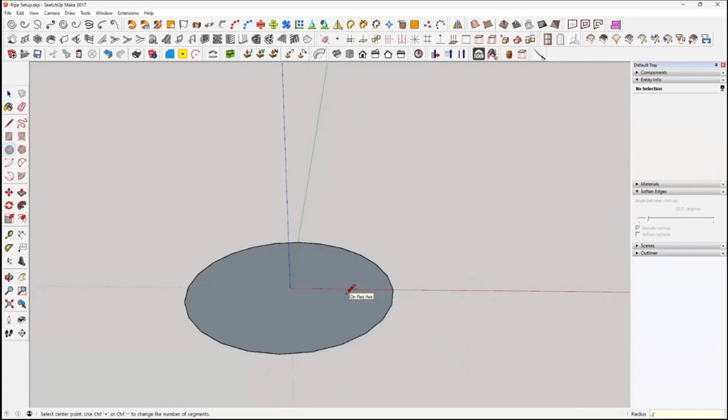So in SketchUp, the rod was 4mm I think. Draw a circle right in the origin along the red axis, so it's 4mm, so that's 0.2, and that'll give me a 4mm inside.

We'll click on the circle, come up to the entity info, it tells you the radius is 0.2, and up the segments to 40, which gives a bit of a smoother curve.

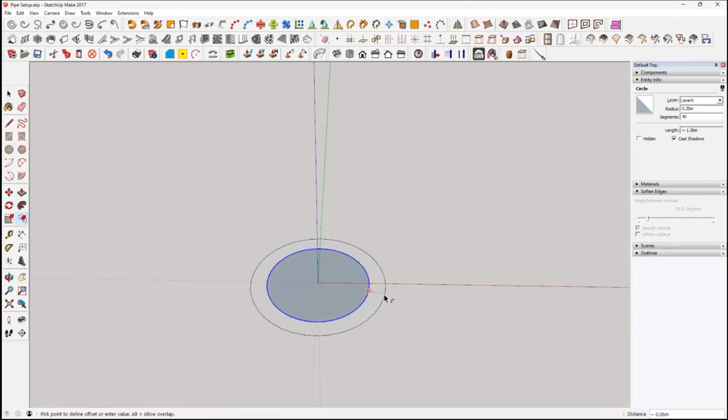What you need to do is go to the left and the offset tool, click on the edge and pull out the offset, 0.05, that's 0.5 mil. Sounds good to me.

So what we do is highlight all that, move tool, click along the right arrow to keep it on the red axis, and control, and it'll duplicate it along the red axis. Just to give us a spare one there in case I mess up.

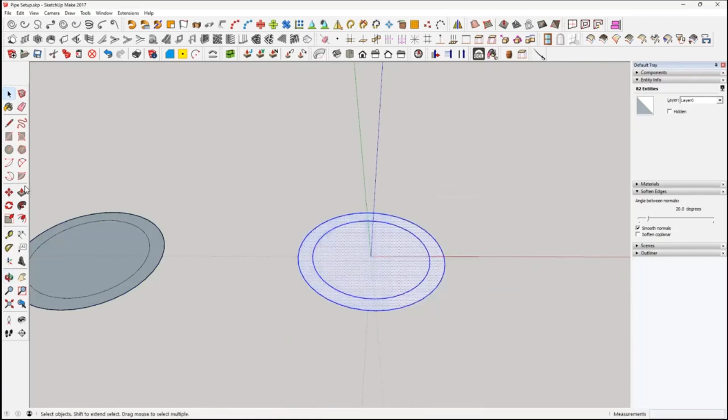So these actually, we should have reversed the faces on these, so we've got the white faces facing out. Right click, reverse face, delete the middle one. Now this is going to be the thickness of our pipe, so it's 0.5 mil thick.

What I need now is a guideline, so I'll get the tape measure from the centre, because the overall height - I'm doing a T joint, by the way - is going to be 10 to 11 mil. So if I click on the centre and draw it along the red axis, the centre of it will be half, so 0.5, just for demo's sake.

So we've got a guideline here, it's 5 mil long. We'll come over to the left and we'll use our pie tool.

Now what we want is, we don't want it flat, we want it upright. So if you press the left arrow, it changes it to the green one. Click on the end of the point we made, then go to the centre, or actually press red, and it'll constrain it - you can't go off centre then - and it'll click to the origin.

So we click there, and what we do is start drawing our arc. Now it's your choice, you can have whatever you like - we'll do a 90-degree elbow, so we tap in 90, bottom right hand corner, 90, or press enter. So we know that's going to sweep round.

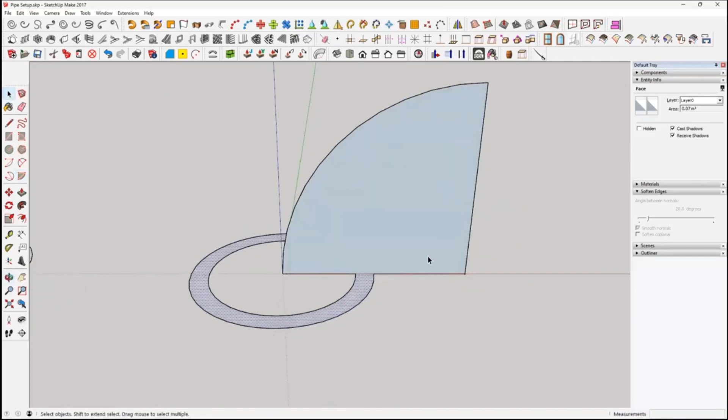So what we need to do is come in and delete some of these lines we don't need - the bottom line there, there's one dividing this circle, delete that one, delete that one. So what we need to do then is make this ring follow there, hopefully give us a pipe.

So what we need to do is click on this swept curve, and then go to the left, there's a tool there called follow me. Click on follow me, and then click on that blue line, and then we got a curve.

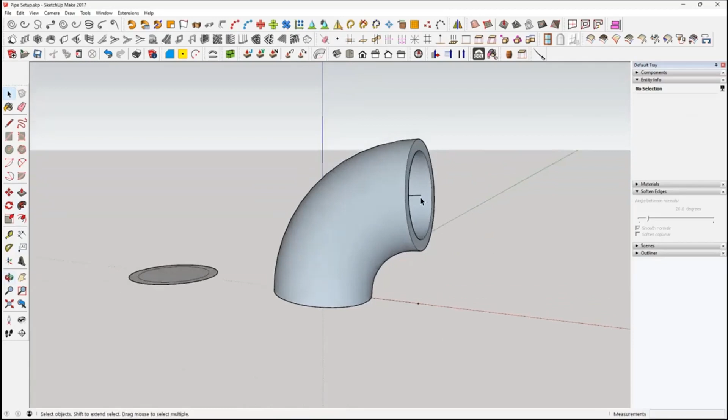Now, point being, this isn't right, because if you look at it, it's followed the curve, and that last section may look straight, but it's not. If you look at that now front on, let's look at it front on - you can see it's at an angle.

So we do a Control Z. There's an easy way around that.

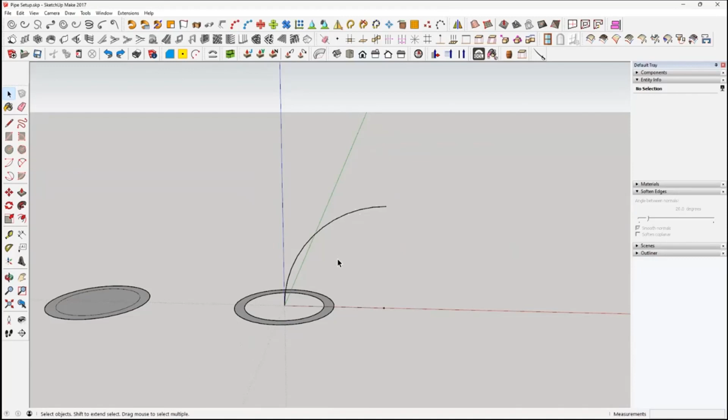We'll click on the line, and what we'll do is draw a straight line. We'll get a pencil, and then go along the red axis, so change this to red, 0.1, enter.

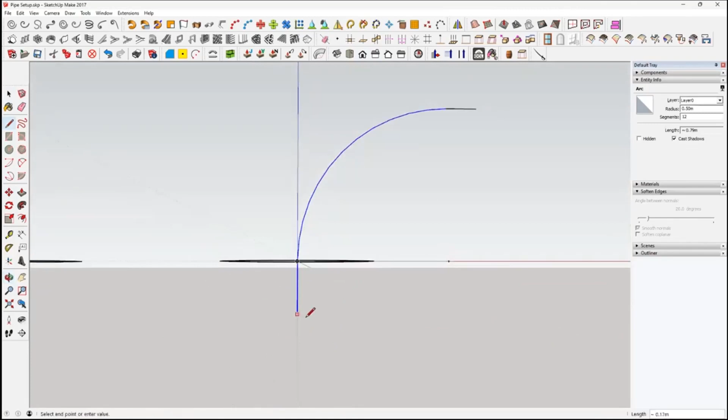And then we'll come to the middle, and go on the blue axis, so we press the up arrow to constrain it to the blue, and then do a 0.1. So now what we've got is this small section.

Excuse me, one minute.

Frog. The middle section and the end section. Now if we click on all three, or we click on the end, do a control-click, we've highlighted all three sections. Up to the top, there's a plug-in.

John will put a link into this one. I'm not sure what it's called, this one, but it's called Super Weld. So we'll weld it together, so it is now one line.

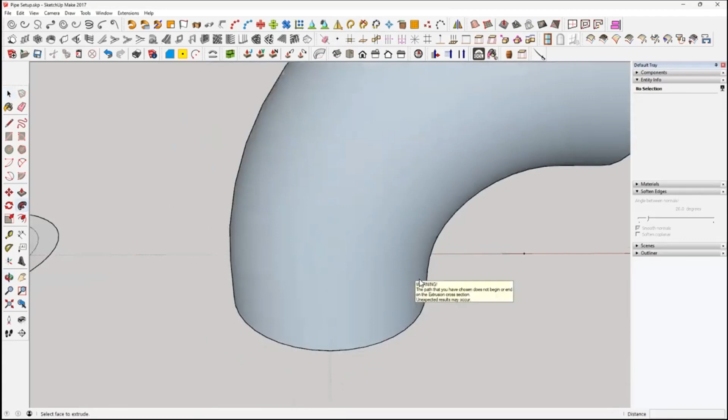So what you need to do is click on the line, click on the follow me tool, and now that's follow me, and that is straight out the end of the line. So what we need to do is highlight it, right click and reverse the faces.

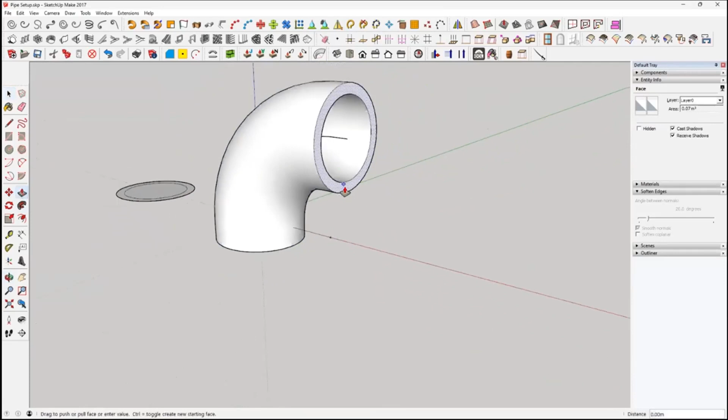But now if I click on this front edge and pull it out, and click on the bottom edge, that'll be a right angle. So that's what we need. So yep, we're good with that.

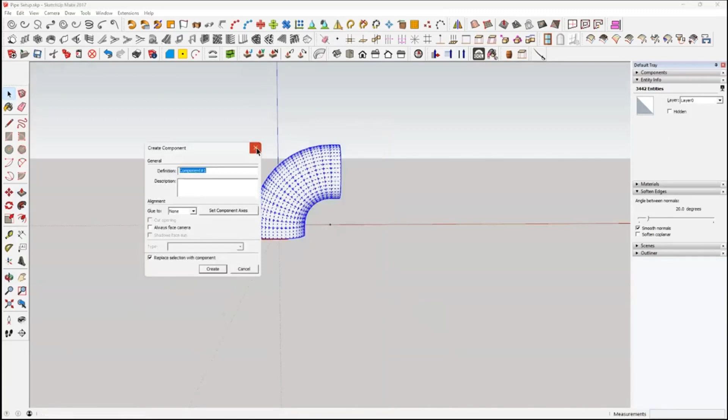So we'll triple click this object, right click, make a group. Right click, make a group. And then we'll right click.

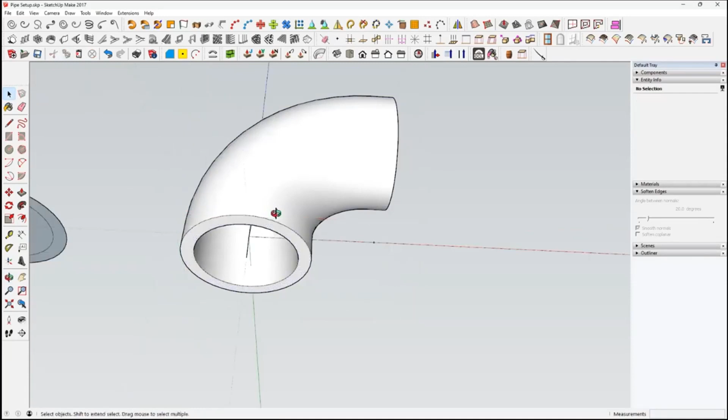Actually, what we'll do is, see this ring at the bottom, we'll double click the group to open it, click on the ring, and we copy it. Then we'll click on this object, right click, and we'll hide it.

And then we'll do an edit, paste in place. So we know that's the diameter of the pipe. Now we don't want this one, but we can still use it because it's bang in the center.

So if we come up to the extensions, what we do is we explode that curve. So now it's all in different sections.

So what we need to do is go up, say one section, not the bottom one, the next one up, and delete it. There is now a gap between the bottom one and the main curve. So if we triple click on that, it will select all that curve and we delete it.

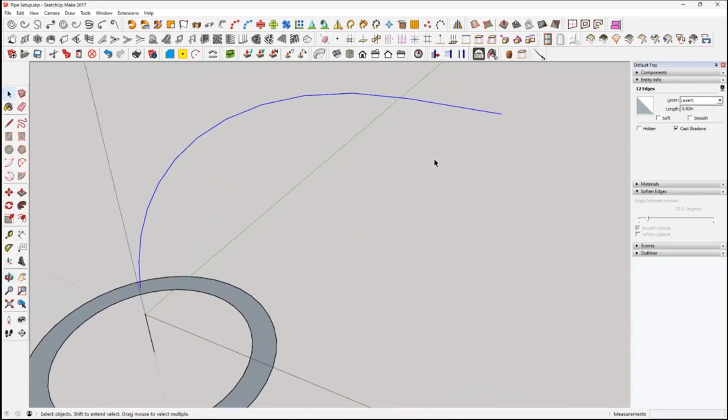At the bottom, we've got the loose bit and then we've got the other bit. So click on the bottom, do a control, click on the up, and then weld it together with Super Weld.

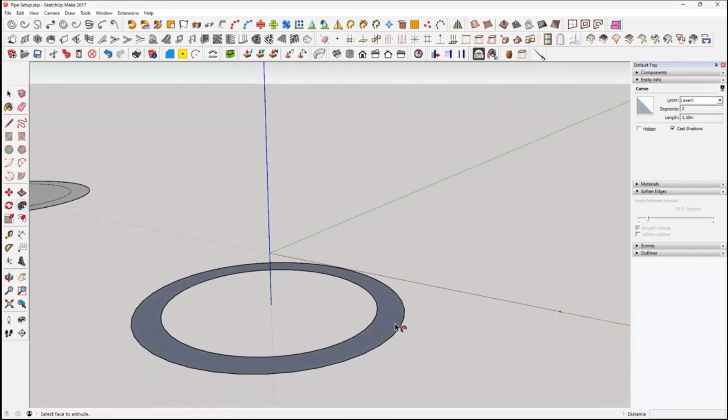So it's one item. Click on the item, the line going up, follow me tool, and then we click on there. And then we've got our up pipe.

So if we highlight this, right click, and there is a soften smooth edges option. Do that and it just softens the edges for you.

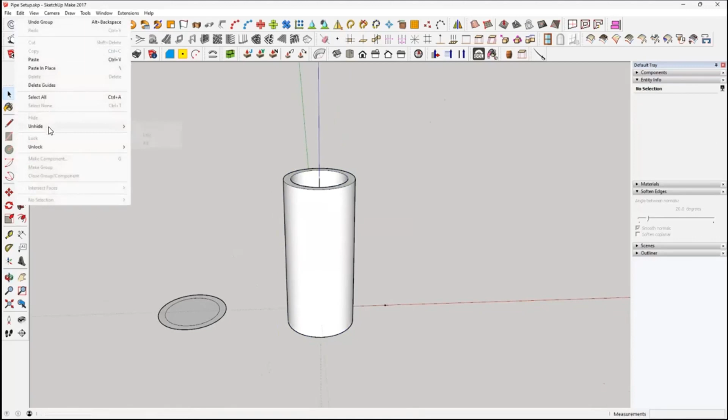Triple click, right click, make a group. And if we do an edit and we unhide the one we hid, there we go, we got our T-piece.

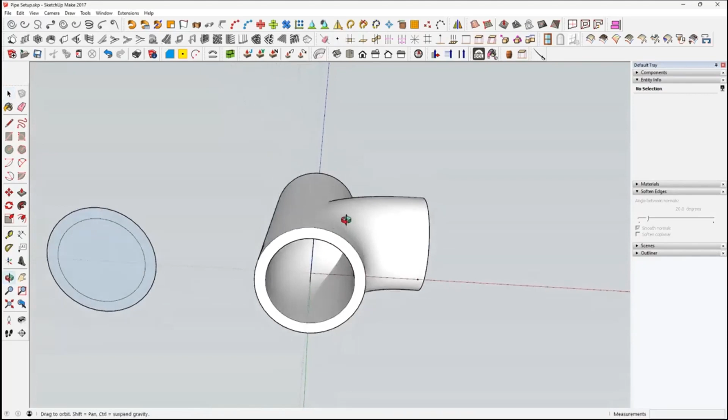Now, you can explode this, join it, intersect it, because at the moment there's no hole in it. But the way I'm designing this is to push a rod inside, and I found that leaving that piece in the middle actually strengthened it in there.

So you can come in, intersect it, take bits out, but really there's no need, unless you're going to use it to look through. But if you're going to stick a pipe in the end, you'll never know. So now we've got two bits.

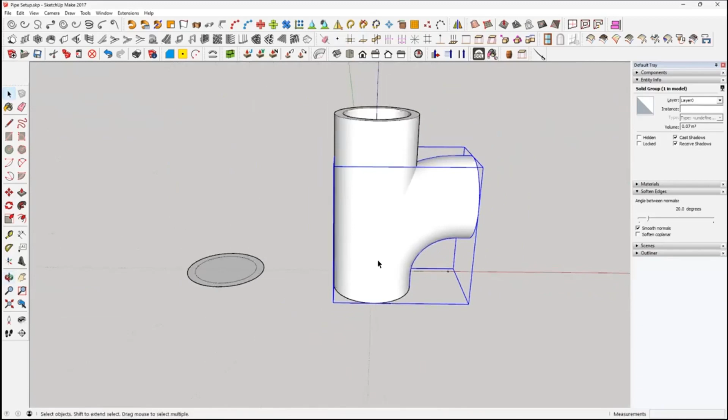Right, what we need is a collar to go on there. So we've got our original, and we know that's the outside wall. Let's delete the middle. Actually, we'll duplicate that just in case.

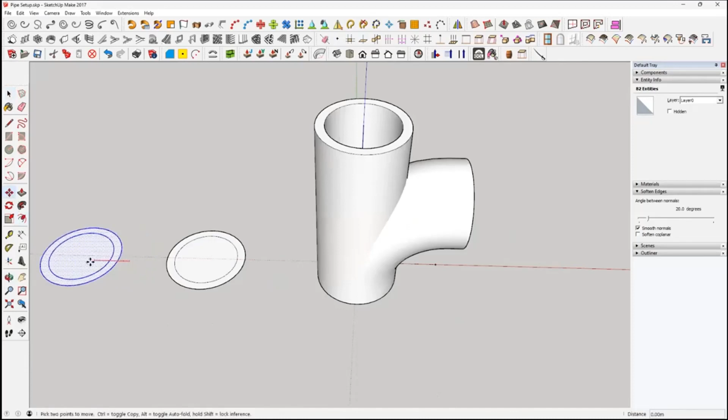Do a control along the red. That wasn't far enough, was it? Move it along the red. Good. So we'll come in, we'll delete the middle bit, but then we want to make a collar.

So we know this is the thickness of our pipe. We get the offset tool and we click on the edge and we come along and we now do another, say 0.5, no 0.1. Too much? 0.5. Oh, I know, 5. Yeah, that's probably better.

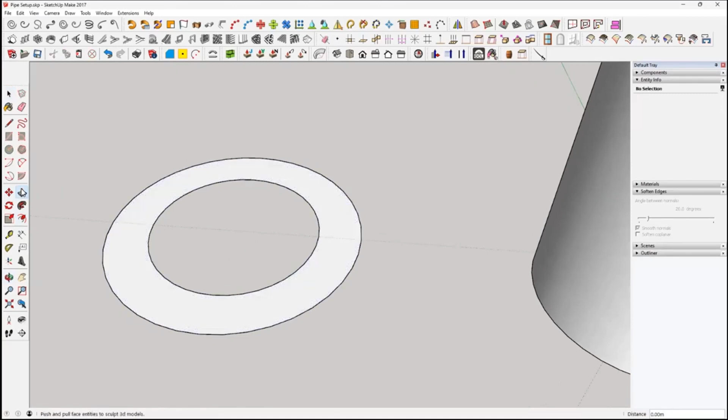Right, and then what we do is take that middle ring out, delete, and this will be our collar. So if we pull that up, sorry, push pull tool on the left there. I must explain myself. Push pull tool, and then just pull it up. So 1 mil, 0.1, 1 mil.

What we need to do is triple click to select all, right click, and make a group. We'll use that as our collar. What they do is put this on top of there.

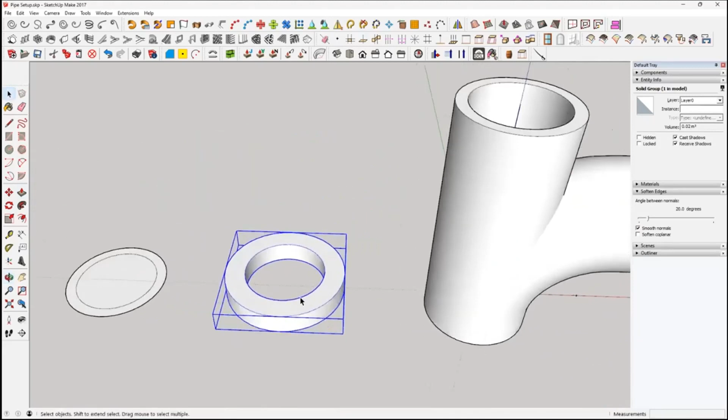Sometimes, if you're clever, you can get it there in the middle. Click on, press the up arrow, so we're going up, then click on there, the edge, and press the up arrow again. If you're clever, it works - it actually lines up perfectly.

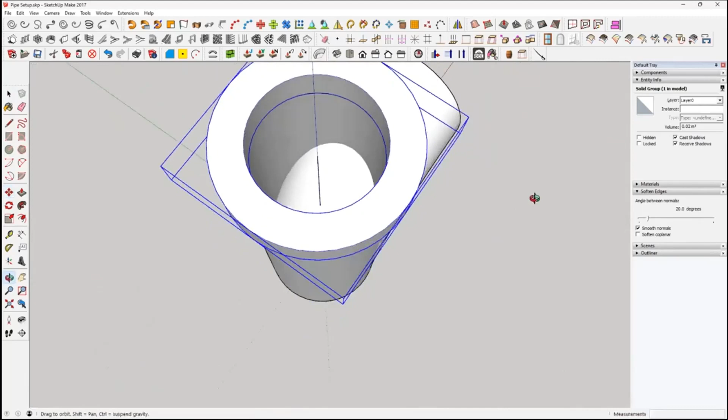So now we've got our collar top. We click on the collar. Oh, I just moved that. Click on the collar - yeah, it can't move.

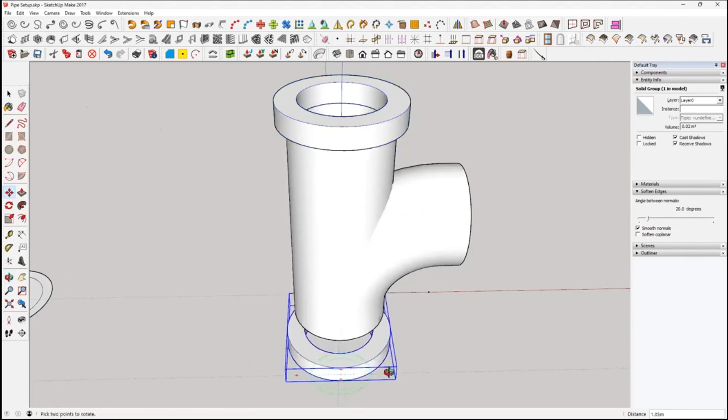Do a control along the Z axis with the up arrow, and we duplicate it, come down. Same again, click on the edge, just go up until you meet. There we go, and that's perfectly lined up.

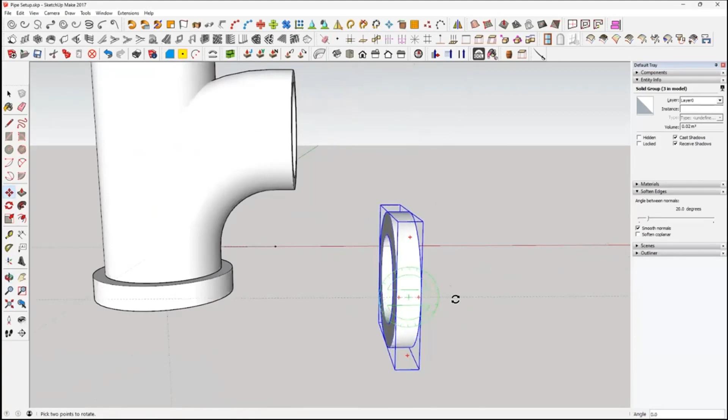So now we've got that, we want one on this end. Easy way to do it is control along the red axis, and like I said before, if you hover over it, one of the crosses will bring up a protractor tool. Bring it round, angle 0, that'll be straight. Same again, see if we can get it spot on this time.

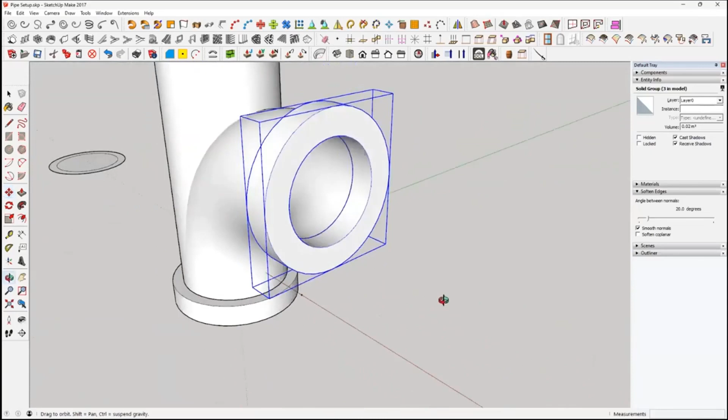Pick the middle, up arrow, to there, and ooh, good shot, there we go. So basically that is an elbow.

So we've got 3 different parts, which is worth keeping separate, because if you want to make other stuff, it's all there. What you can do is click on the right angle and then click on the collar, and those 2 bits, right click and make it a group.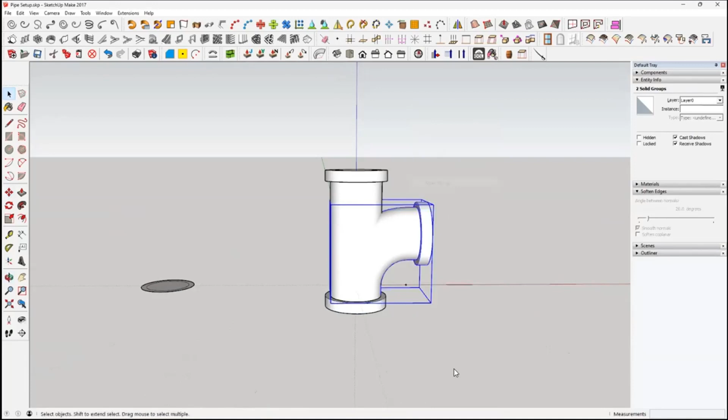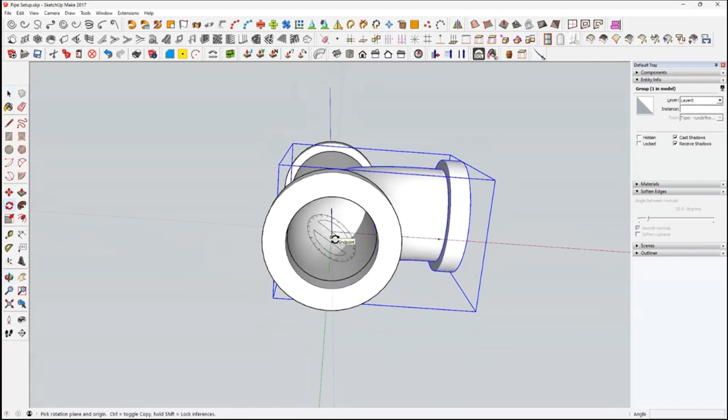So now what you can do is come in the bottom. We've got our line that we drew from earlier, which we know is dead straight up the middle. If you come with a protractor tool, first we'll click on that collar and elbow on the sweep there. Go on the protractor tool, find that line, put your protractor on it, and press the blue, which is the up arrow.

Then what we need to do is click on and we'll find the end there. You can see it changes - should change. It's a bit awkward because it's from a distance, but I think that's it.

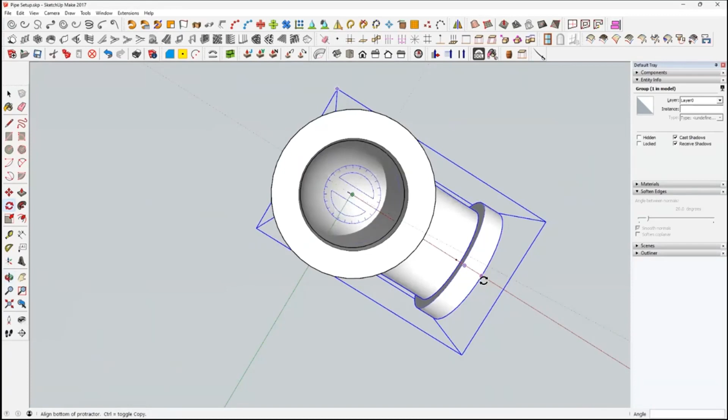There. Then what we do is control, and then we can move it round. So if we move it at 90, there, it's got an angle - you can type the angle in, but we're actually on 90. Click on, and then do the star times 3, enter, and there we go. We've got a 3-way doobrey for our pipes.

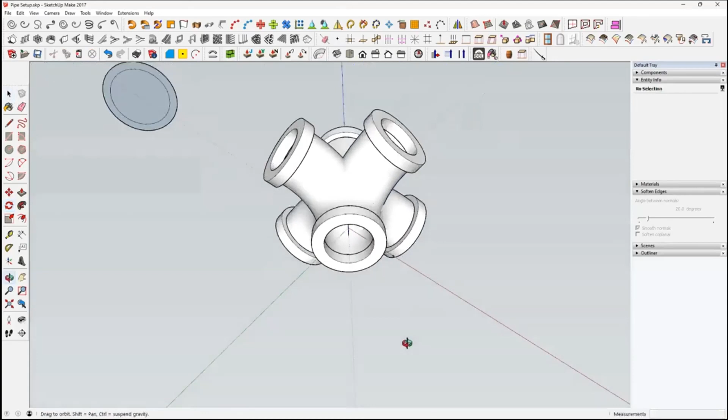Now highlight the whole thing, click on, control along the red axis, times 3, there we go. So what you can do now is delete that.

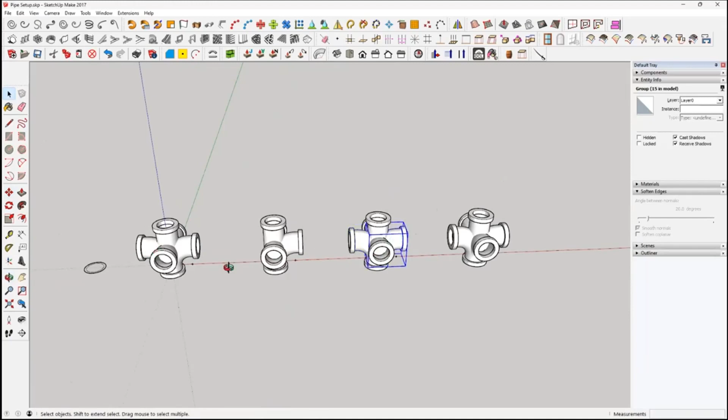You've got a 3-way, delete those 2 - or no, we've got that one, haven't we? You get the idea - you can duplicate that and make what combination you like just from the one angle.

And then these do print. I will show you - I have set it up already.

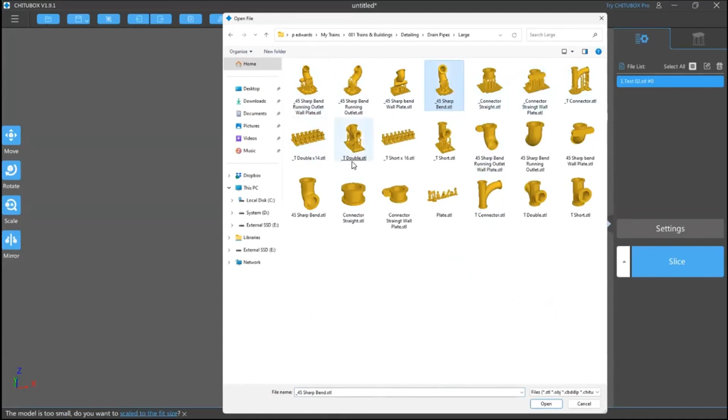If I open there, my detailing, where is it? Drain pipes large. So what I've done is I've got different ones set up here - plain, straight, curved - and they're pre-supported as well. So there we go, what we've got.

There's that window down there, we'll get rid of that. We'll just minimise slightly, Ed.

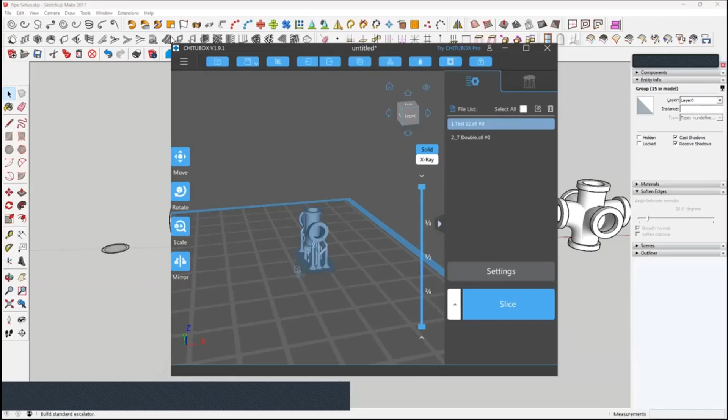Yeah, I'm with you - just as you said that, John. Yeah. Can you see? Yeah, spot on, mate, yep.

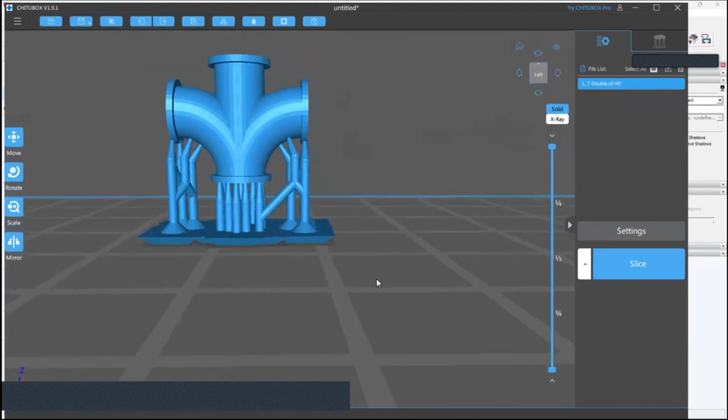So there is a pre-supported one - I just did a left and a right. And those supports come off very easy.

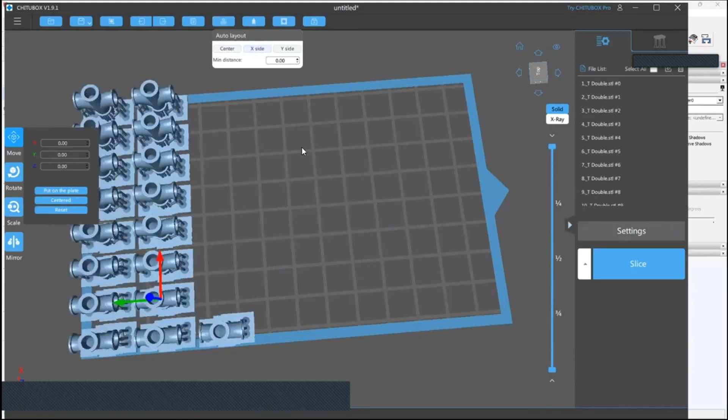Print these off - I normally print, say, 10, 20 of them in one go. If you press copy, get a load of them, and arrange to the side. Take that one out - bit close to the edge, take that out. Take that out. Select all, there we go.

Put your next lot in. Fill your bed up - always fill your bed up with resin print, even if you chuck some extras on, because it takes the same amount of time to print one of these as it does a whole bed. So it's not like FDM.